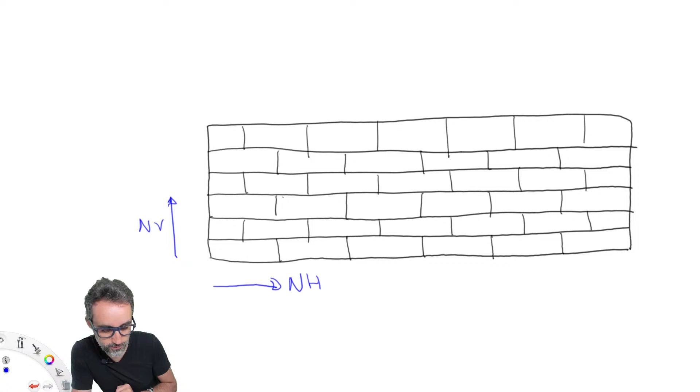For this one we're going to calculate the amount of bricks in the horizontal direction, the amount of bricks in the vertical direction, and then obviously for each brick we're going to calculate the width, the height, and the depth. That's going to be very simple.

So now once we have that, we will want to notice that there will be several different families. This will be one family of bricks. The second family will be this family of bricks here.

So before that, we're going to add here that we will want to find the center points of each one of these bricks. Oh, that's not going to work. We will want to find the base point for those bricks, right? And then once we have this, we want to do also the base points for each one of these.

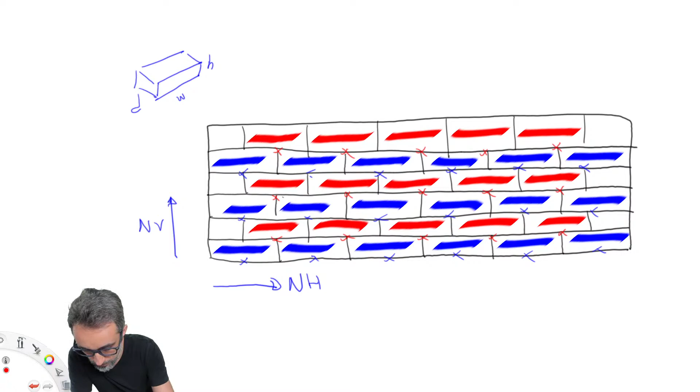And for this, I'm going to call these bricks the base bricks. Those are going to be the base. Then these ones are going to be called the central.

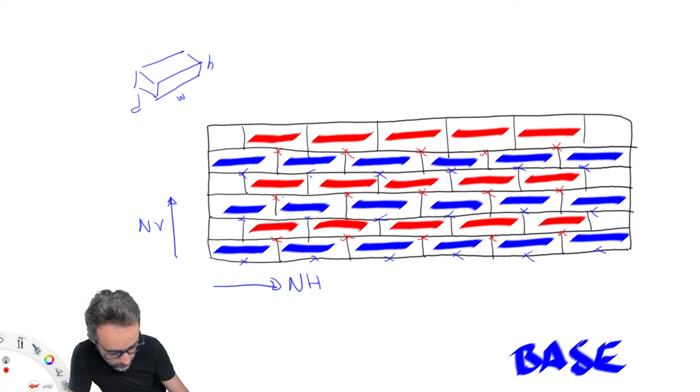And then after that, we are going to have these bricks. This one, this one, this one, this one, this one, and this one. Those are going to be the edge bricks, for example. Doesn't matter what we call them, really. And then we will have to find the base points for all of them.

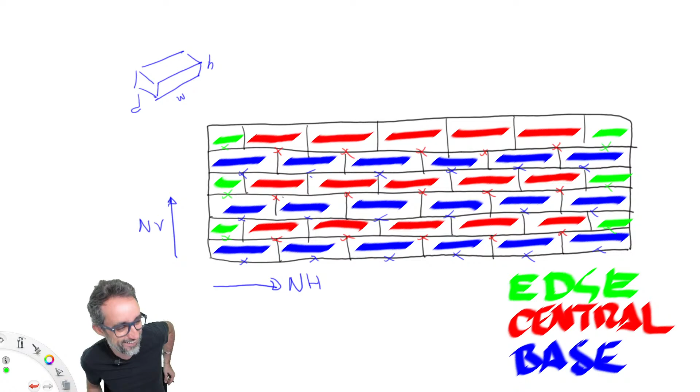The mortar thickness. We will include the mortar thickness, Richard. Don't worry about that. We will make sure. We'll make sure to include Carl Singline.

What is this? Oh, so Carl Singline is a person. Ah, okay. Oh, he has an interview with Brian. Oh, okay. All right. I think I've seen this channel before. Yeah, it has a bunch of robotic stuff. Oh, yeah, that's pretty cool. But you're right. It's how to generate a brick wall in Grasshopper. Yep.

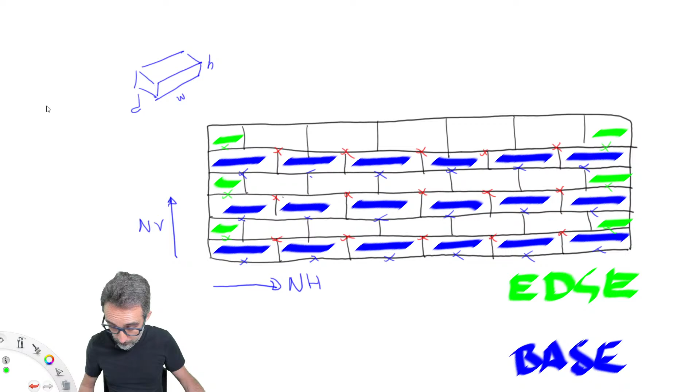Well, that's a different method. We're going to use a different one here. Oops, no, not this one. Here. Okay, so we are here, I think, and then if we take this off and this off and this off, that's all about the points we need to generate. So I think I can probably start telling that story.

Okay. All right. Let's get hands on. So,

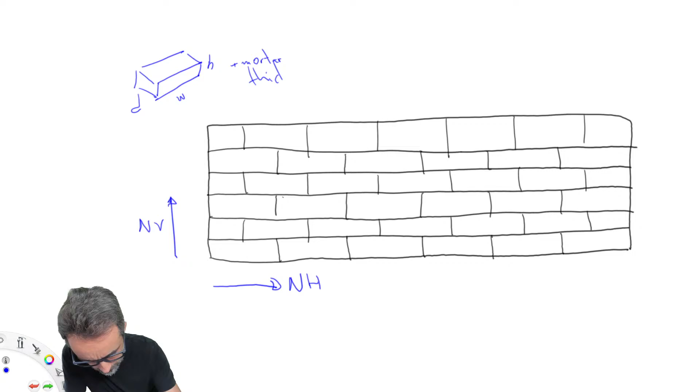And you know what? Where's Richard? You're also right. Let me add here somewhere that we're going to add the mortar thickness as well. Plus mortar thickness. It's very difficult to write here. Oh, that looks terrible. It's fine. I'll just say it verbally that we will add it as a parameter. Don't worry. All right.

Am I centered on the screen? Yes. All right. Let's do this. This is going to be a tough one. Okay. My batteries are low. If they go away, just let me know. Just bang the chat, okay? Okay. All right, let's get started.

So there are many different ways of creating brick walls. It depends on what your parameters are, whether you have a surface and you want to generate a layout of bricks that approximate that surface. That's one way to go about that. Another way is if you have the axis lines on the floor and you want to populate bricks on top of those axis lines, that's a completely different story.

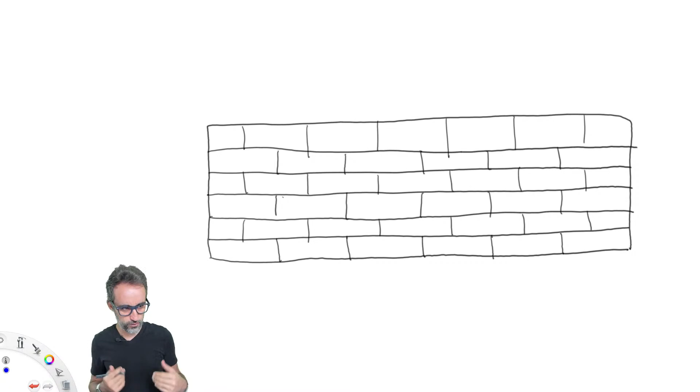For me, what's going to be important as parameters in this particular exercise are going to be how many bricks do I want in one direction, how many bricks do I want in the vertical direction, and then the dimensions of the brick. As simple as that.

And then the more rows, the more columns, or the bigger the bricks, then the larger the wall will be. And I'm going to assume that it's going to be a very vertical wall that is probably going to be on the XZ plane, like a vertical wall, something like that, okay? But again, this is a very simple way of looking at it.

If you need other inputs, such as a surface, there are other algorithms. Maybe at some point we can do examples about that here in the channel. We'll see about that, all right? But I actually like this example because it's a bit more data-centric and it involves a little bit more data manipulation as opposed to other examples. And I think this is something that I want to strengthen in this series with all of you. So that's why I'm going to choose this one.

Now, what is this process going to look like? Well, it's going to be very simple. As we have seen before, when we create arrangements of things that have slightly different orientations or locations, it's very useful to think of these walls as arrangements that have several subgroups of elements within them. So in this case, I think it would be useful to think of the wall as having three groups. One of them is what I'm going to call the base bricks, which is the first layer of bricks, all full bricks, and then that same layer every other layer as we go up.

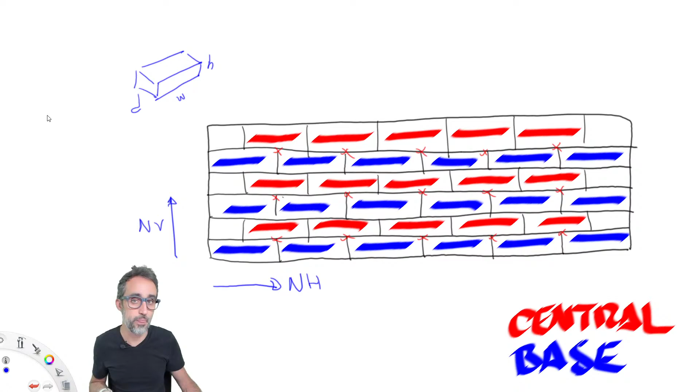And last but not least, we will have what I will call the edge bricks. Because the bricks are staggered, to have a perfectly square bound brick wall, I will need to create a special subset of small half bricks that will be inserted on the sides of the wall.

Now, I have not talked about that in the parameters, but very likely I will also want to control the thickness of the mortar between bricks. That could be interesting because it will also make it easier for us to see them when we render them. So I may want to add that as a parameter as well. As you can imagine, the problem is going to be as simple as generating 3 families of points, or better yet, 3 families of planes, on top of which we will generate these boxes with the control dimensions minus the offset of the mortar. Okay, so I think that is going to be the first step.

And as we get the brick wall up, the second step that we will follow further down in this video will be figuring out an algorithm to create the effect of an explosion in front of this brick wall. Let's get started with this one, and then we can figure out the explosion part.

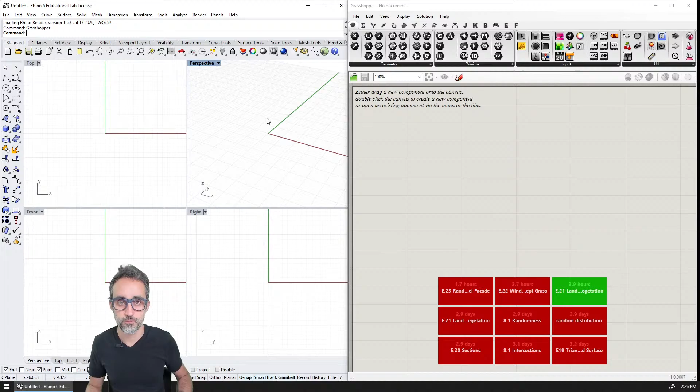And then, for example, I'm going to create a slider with 5 bricks in the X direction, number of bricks in the horizontal direction, number of bricks in the vertical direction. And then what are we going to do for the brick size? We're going to do the width, the height, and the depth of the brick.

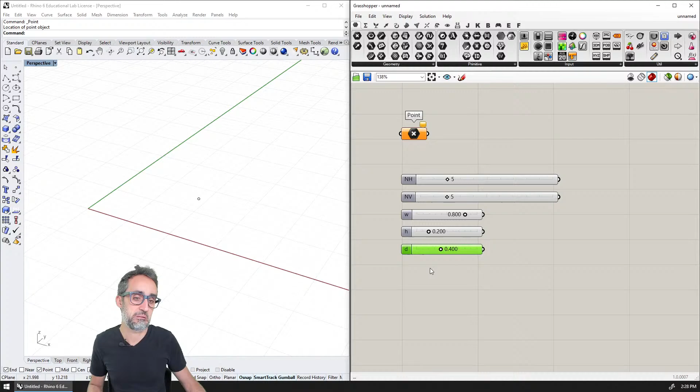All right, and then the width is going to be, for example, 0.8, the height is going to be 0.2, and the depth is going to be 0.4, which I think is about a nice proportion for a brick, correct? Let's see, let's create a box, for example. Oops, the other way around, like this. Yeah, this looks about right for a brick, huh? Okay.

So, all right. Let's do this. So, I am going to start by the mortar. Mortar thickness going to be 0.05. Maybe that's a lot actually. Okay, for example, that much. We'll see. Okay, so

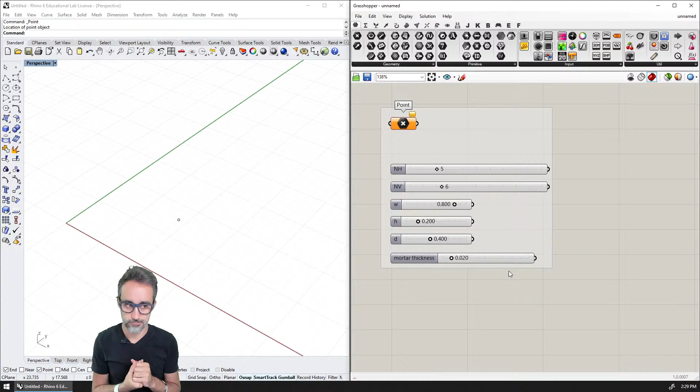now I'm going to start by taking the point in, creating an XY plane, creating a box, and then copying the box in the X direction. But instead of copying the box, why don't we just copy the planes? And then we use those planes for bricks, because that's going to be way more intelligent. Okay, so let's get started.

So I have gone ahead and started a Rhino file with a Grasshopper definition where I have created a bunch of sliders representing how many bricks in the X direction, how many bricks in the vertical direction, the width, height, and depth of each brick, and an extra parameter for the thickness of the mortar.

All right. And because I like having some kind of Rhino connection so that I can move things around, I've created a dummy point in Rhino that I will use as the base for the first brick, so that I can move this point around and move the wall around in Rhino with this tactile interface kind of situation.

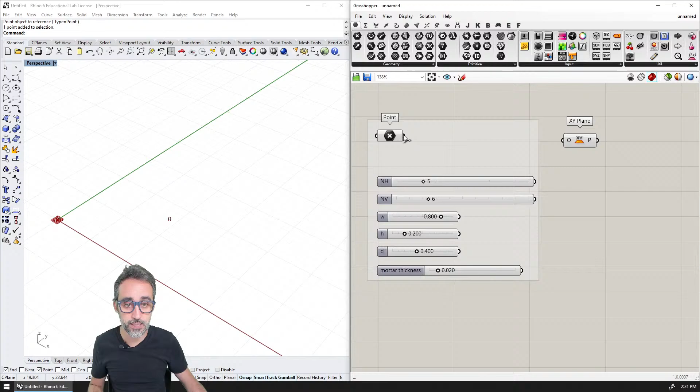And then, very simply, I'm going to create an XY plane based on that point, and a box centered around that point. So if I go to box and say box centered on a plane, you can see this is going to be the plane of the box. The size of the box in the X direction is going to be the width, in the Y direction the depth, and in the Z direction the height.

Is this so? Let me bake this and measure the distance between the starting point and the end point, and you can see that it's 1.6. That's what I was afraid of, because the size of the box in the X direction is actually double the size. So this is not exactly what I want.

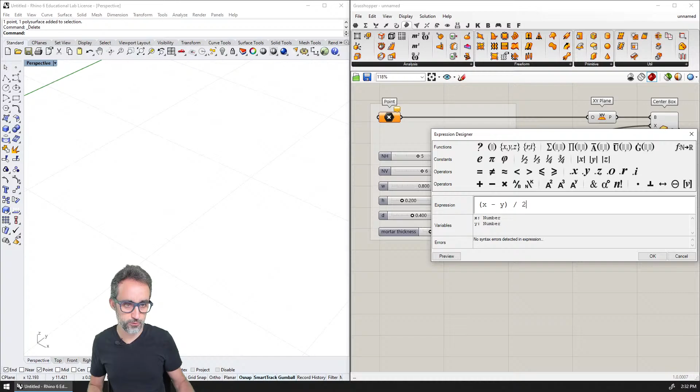So I would like to create an expression where I take the dimension and the mortar, and say the size of the brick in one direction is going to be whatever you're giving me minus the mortar width, divided by 2. And that's going to be the same for each of the 3 values: this is what I'm going to use for X, this for Z, and this for Y.

And where is my point? Oh, I deleted my point. Sorry. Okay, I wanted to delete this. And now let me bake this brick to see if it's okay. The distance between this point and this point now is 0.78. That sounds about right.

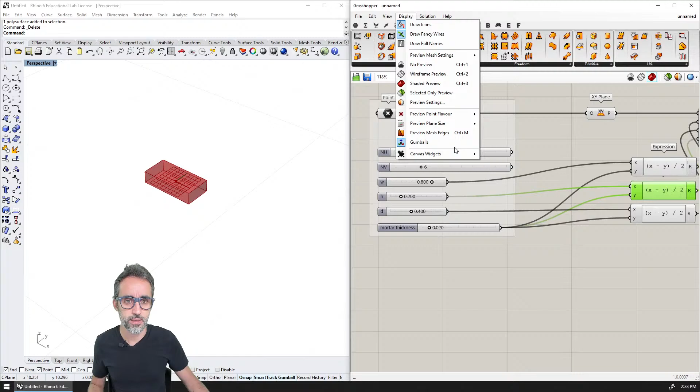Okay, and then I'm going to make the plane a little smaller, or maybe I should just make the bricks bigger. I don't know. I'm going to make the plane a little smaller in this case because it's taking up a lot of real estate here, or maybe even smaller, 0.3. Okay, all right, so I have the first brick.

I think we are off to a pretty good start, right? So I have the first brick, and then what am I going to do? Well, this is the first brick for what I have called the family of base bricks, okay? So remember, because I have now this point here, and you see that in the diagram I am representing it from the bottom, but I've actually chosen to just use it from the center, so maybe it's just easier to think that these points are going to be on the center. All right, so I have the first one.

Now what I need to do is generate this first row, and once I have that row, I will be able to copy it as many times in the vertical direction. So let me create that row by making sure that I create a series of numbers. I basically need to take this box and move it along the x direction. So I'm going to create a unit vector x, as many times as bricks I have in the horizontal direction, and the distance between them has to be this distance here, the width of the brick, including the mortar, right?

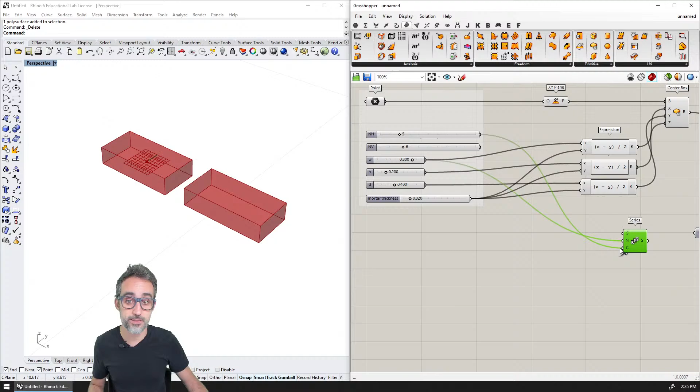So that's why I need to generate a series of x vectors that starts with 0, where the step size is going to be the width of the brick, and where the number of values is going to be how many bricks I have in the x direction. So that I'm going to compute here, and you can see that now I have the 5 bricks, and they're nicely separated by this 0.02 millimeter gap. Is that correct? Let me bake this, and let me make sure to measure the distance between them. So this one, distance 0.02. All right, wonderful. So this is working.

However, of course, one thing to notice here. What I have done is I have taken the one brick that I generated and I have copied the brick along the x direction. That has already created one box here that is redundant, right? But at the same time, because I'm moving the whole brick, now I have lost references to where the center of each brick is, which I will need farther down the line when I start doing the explosion part. Because I will need to calculate the distance of the bomb to each one of the bricks, and right now I don't have a reference to the brick.

And I also discussed in previous videos how generating a box may not seem complex, but it's much more complex than a plane. So generating complex geometry as an intermediate step, if you're not going to use it, is not a great practice. So actually, I would like to suggest that we put a hold on creating any kind of brick yet, and instead we work only with planes. We copy these planes, we create arrays of planes, and then when we are done with creating all the planes, we use those planes to generate clean boxes that are perfectly ready to be populated like this, you know? So that's what I'm going to suggest right now.

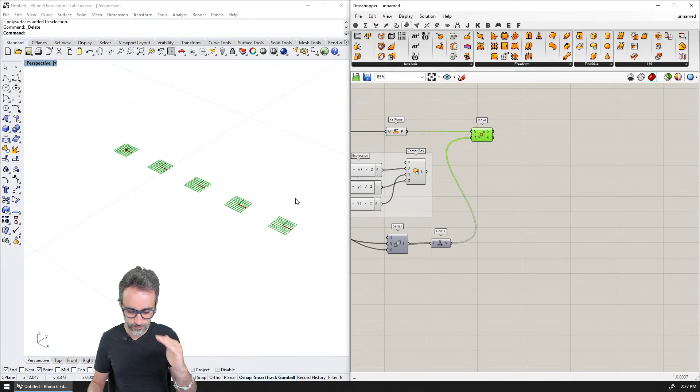So I'm going to take this and I'm going to say 0.5 times the value of x. So that is what I want to do. So this is going to give me the value of 3. And then what I need to do now is I need to take all these planes and copy them in the z direction 3 times.

So if I have 6 here, so half the amount of rows. So very similar as well. So I'm going to do series and I'm going to start with 0. The step size is going to be 2 times the height of the brick, because remember, in this case now, the blue rows are spaced 2 bricks apart. So I'm going to do another expression here, which is going to be, I'm going to take the height of the brick and I'm going to multiply it by 2. And the step is going to be 2 times that.

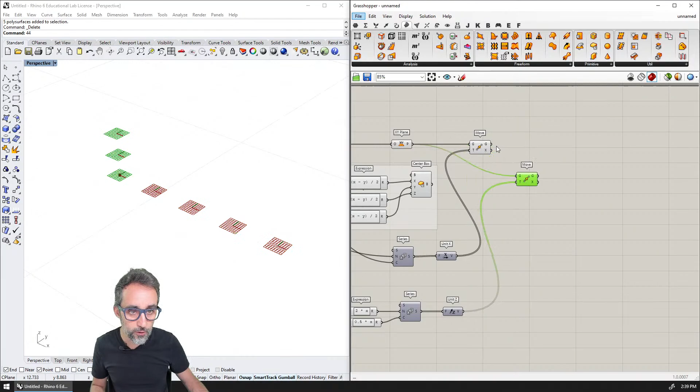And then how many values do I need? Is going to be half the amount of vertical rows. And I'm going to use that to create Z vectors. And then I'm going to use that to move all these planes in the Z direction. But you're seeing that we're getting data problems here. So what I'm going to do is I'm going to graft this and I'm going to use this here.

And now you can see that what I have is a data tree that has 3 branches, 1 per row, and then 5 planes for each one of the rows. All right. And I have decided to graft here just because I think that having the bricks on the same row, on the same list, is a little cleaner than it is the other way around. But there's no big particular reason here.

Now, this could go well, except for the fact that if I now have 5, 4, 3, 2, well, this actually is working. So if I have 7 rows, this is fine. So, okay, this is going to be fine, but it will not be fine very soon.

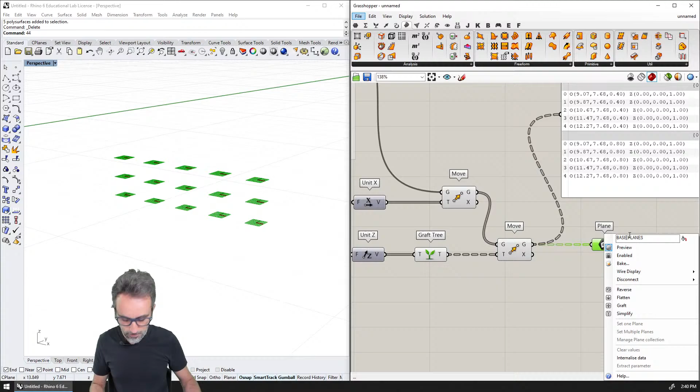And as I said before, this would be very ready now to, for example, be plugged in here and create these bricks. Okay, but we're not going to do that yet because we're going to put a pin on that one. Or, I mean, we can turn it off, why not? But it can already be there.

Now, what is the next thing we need to do? We need to work on the central bricks. The central bricks are going to be very similar. It's just that the first one is going to be a little offset. So we're going to have to move the plane a little bit in that direction and then create a grid with a few less elements. So it's going to involve a little bit of numerical manipulation. So how are we going to do that?

We're going to take the original plane, all right? And then we're going to create a new vector to move this plane and offset it here to the origin of the new collection of the central planes. So that is going to be a distance that is going to be half a brick in that direction, and it's going to be a full brick in the vertical direction. So let's do that. So I'm going to go here, okay?

And I'm going to move this plane. I'm going to take this plane and I'm going to move it, okay? And then how much am I going to move it? I'm going to move it by a vector that I'm going to create from x, y, z coordinates. The x coordinate is going to be half the distance of a brick. So I'm going to copy this expression and I'm going to say half the width of a brick. That's going to be the x.

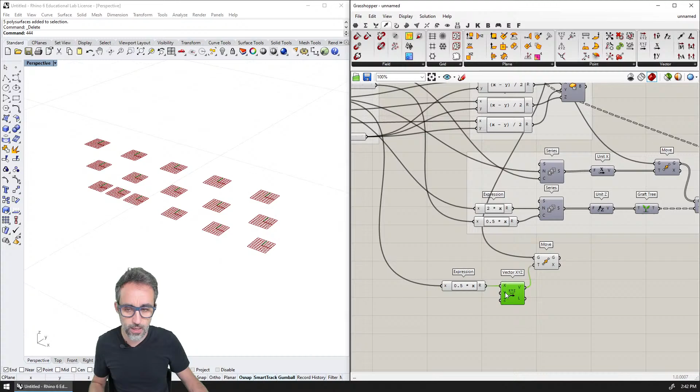And then in z, sorry, not in y, is going to be a full height of the brick. Okay, so can you see how this brick is now like right there in the middle? Correct. So that is going to be the initial plane.

And then at this point, I think the rules for making these planes are going to be fairly similar to this one. So what I'm going to do is I'm going to move the original plane. I will want to move it in the x direction by a series of vectors that are apart a distance of the width of the brick.

So I'm going to create a new series, which is going to start at 0, and the step size is going to be the width of the brick. And the number of values is going to be the number of bricks in the x direction. But that's actually not true, because if I do that, then I get one extra brick on the other side. So what I actually need to do is create an expression here. Look at what I'm going to do.

I'm going to press Shift and Control to detach this cable and plug it into the other place. And then here I'm going to say, whatever you give me, -1. And then I'm going to plug that in here, and now I have this many elements, -1. Oops, actually I think I connected too many things. So let me do this. All right, now we got it.

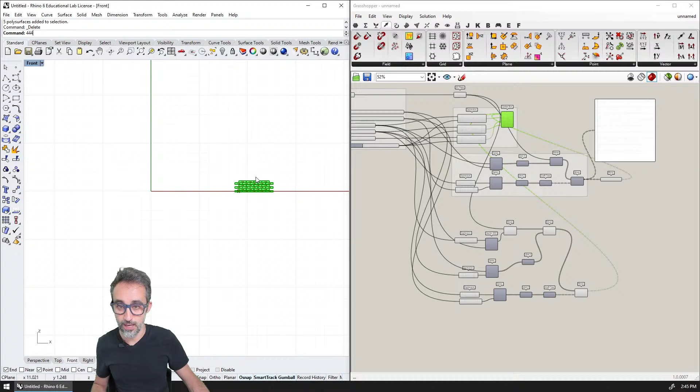All right, so if I do that, then I'm going to get these planes, and if I turn this on and plug the planes in here, you can see that I'm very close. Let me do a frontal view. I'm very close to that. However, there's a tiny detail that is not going to work.

Let's say right now we have 6 vertical rows of bricks. If I now switch to 5, you can see that it doesn't switch to 5. And if I switch to 4, it all of a sudden removes 2 rows. And if I switch to 7, I get 8 instead, and 8 stays as well, and 9 gives me 10 rows. So there is some kind of problem with having an odd number of vertical rows.

And that is because when I have an odd number, for the base bricks, the blue ones, I should have half the amount of rows rounded up. So when I have 7 rows, I should have 4 of these base rows. But for the central ones, I should have half this number rounded down. So that's going to be 3.

And this is not happening because here, when I have these planes and I say how many times do I need to copy them up, I'm using this expression, and the amount of elements is being rounded up to 4 in this series. Because when I say how many numbers do I need, I need half x, x being 7, the number of rows. So here the value is 3.5, which is technically correct. But inside of series, it is automatically rounded up, whereas what I need is this number to be rounded down.

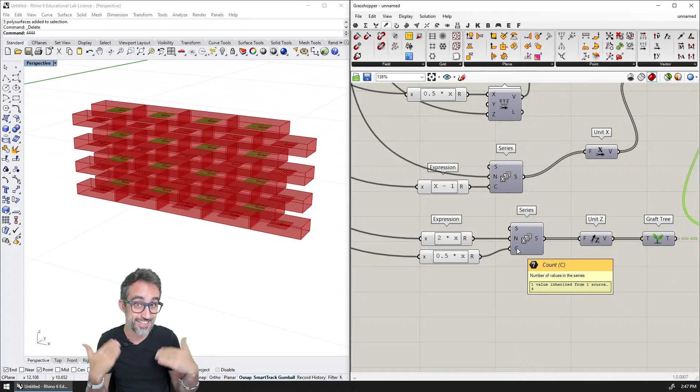So I'm going to use the expression editor, which is wonderful, to find an expression called floor. Floor is a function that takes a number and rounds it to the largest integer that is less than the specified number. In other words, it rounds the number down. So I'm going to calculate the floor of whatever this is. And this gives me the number 4, which doesn't get weirdly rounded. And now I get exactly the 4 rows that I wanted.

And if I now play with this, you can see that now 8, 9, 10, 11, 12, or less or more. All right? And I'm going to make this a little larger as well. Or not.

I'm just going to, sorry, I'm just going to make this a little smaller because it's easier to control like that. Okay. Wonderful. So we have two of the groups. Now let's go off to the third group.

Oi, oi. Saeed, how you doing? All this parametric craziness, and here we are doing like square bricks. How about that, huh? Okay.

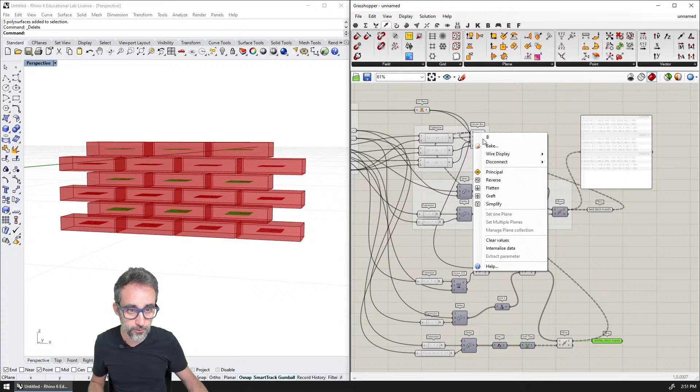The first thing we're going to do is keep things tidy here. So I'm going to call this central brick planes, and I'm going to plug that in. I'm going to disconnect everything here. I'm going to disconnect this. I'm going to plug this in here, and then I'm going to turn it off so that we don't have the visual clutter.

So first thing is going to be moving this plane to a position that is going to be here. And this is going to be in the Z direction a full height of the brick. And in the X direction it's going to be a quarter of a brick, I believe, right? Let's see if that is true.

So first of all, I'm going to group all of this here so that it's clean and tidy. And then I'm going to take this XY plane, I'm going to move it all the way down here. And then I'm going to calculate myself a new XYZ vector. And the X coordinate is going to be a quarter of the width. So I believe this one is taking the width. Yes, it is. So this is going to be 0.25. And again, this is the beauty of using expressions. They're super easy to edit.

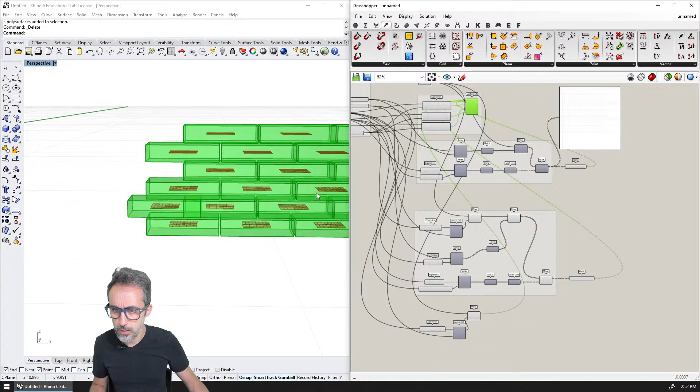And then the Z is going to be basically the height of the brick. And I forgot that this has to be negative. So this is going to be negative, and it looks like that brick is kind of halfway there. So let me turn on the bricks. Okay, so you see that this brick is already halfway there.

So in order to make things a little easier for me, these are the full bricks, and I'm going to copy and paste all of this, and I'm going to create another one that is going to be half bricks. And half bricks is going to be basically the width divided by 4, and then it's going to be 2 and 2.

And as I do that, I'm going to plug that one in here, and you can see that I now have my brick. And I see that I will need to do a better job with the margin. So I will need to say 2 times the margin. Is that what I need to do? Yes, but then the margin is a little bigger here. So I will need to actually work with the margin a little bit to improve it.

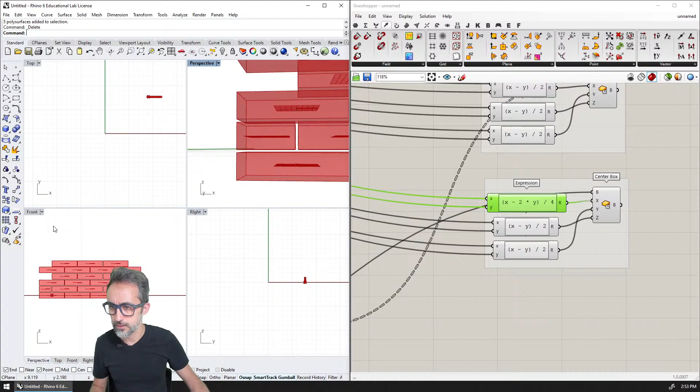No, actually this is correct, right? Yes, you're right. So this is correct. So I needed to double the margin to align this here.

So, okay, so I have that there. That is working. And then the only thing that I need to do now, that was just for the sake of prototype. All right. Should I turn off the other planes? No, I'm just going to keep them there. So I have this plane.

And now what I need to do is calculate how far away I need to move it in the X direction. So that's going to be a series. I'm going to move it in the X direction with a series that is going to have two elements. So I'm going to just hard code this. I'm going to have two elements, so that's going to be the number 2 here.

And then the step size between them is going to be some number. What is it going to be? 1, 2, 3, 4, 5. So it's going to be the amount of bricks on the X direction minus 1 times the width plus another half of these bricks here.

So let me do the rule. The rule is going to be that I'm going to take the width of the brick. Is that what I have here? Yeah, that's the brick. And I'm going to have the amount of bricks in the X, in the horizontal direction. So that's going to be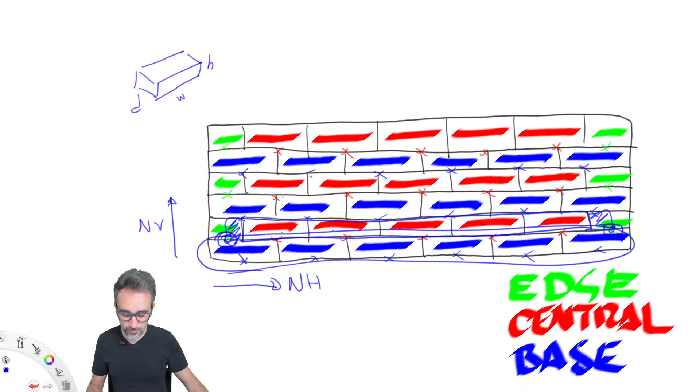And then to that, I actually need to add half a brick, because I have a quarter of a brick here and a quarter of a brick here. So that makes a half of the brick. And therefore, if I have 6 bricks here, the distance between these 2 points is 5.5 bricks.

So this is going to be very easy to encode in an expression: this is going to be the width of the brick, and this is the number in the horizontal direction. I'm going to plug that in here, and then I need to say the width of the brick times how many bricks are in the horizontal direction minus half a brick. I'm going to move this all the way down here, and plug that in there.

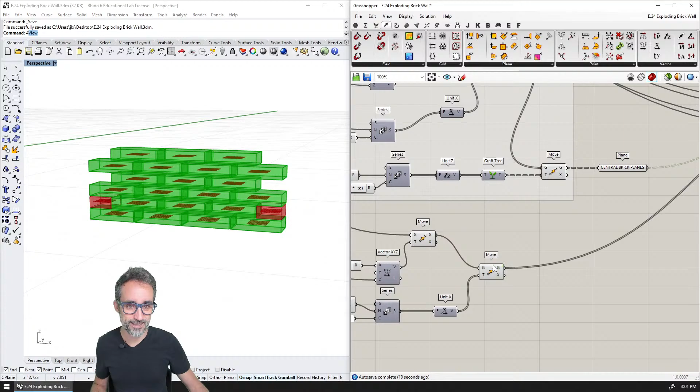And if I now take this here, is that looking good? I think that's looking pretty good, isn't it? Choo-hoo! All right, so now it should be as easy as copying this one, which is the exact same one we used for the other rows, plugging it in here, and then plugging this in here, and we can see how we have now the perfect wall of bricks.

And is this parametric enough? Let's see. I'm going to extend this 4, 5, 6, 7. This is looking pretty good to me. Okay, and then 6, 7, 8. It looks pretty good to me, right? So, yoo-hoo! I think we have a parametric wall of bricks, which gives me a lot of OCD internal pleasure.

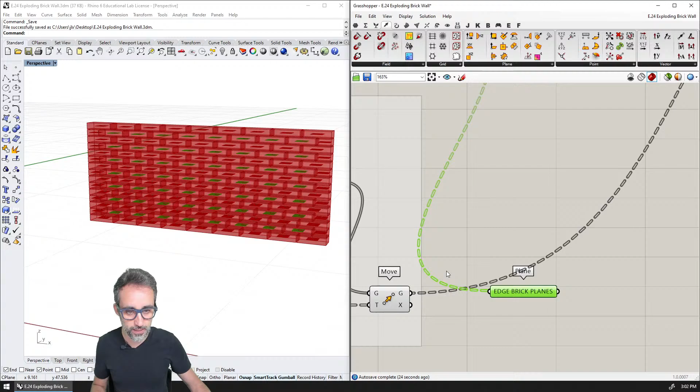Okay, so I'm going to just make sure that everything is a little more clean and ordered. So this is going to be the edge brick planes. I'm going to plug those in here. And if I turn everything off now, for example, and I make sure that these are off, and this plane here is also going to be off, and this point is going to be off. And because I have this point, I can now move the whole wall. I can move it wherever I want.

All right, wonderful. So this was a little tedious and it looks a little bit like spaghetti, but at the end of the day, it was a lot of very simple numerical relations with each other, which at the end of the day is a lot of what we do in parametric modeling. It's just simple numerical relations between geometry.

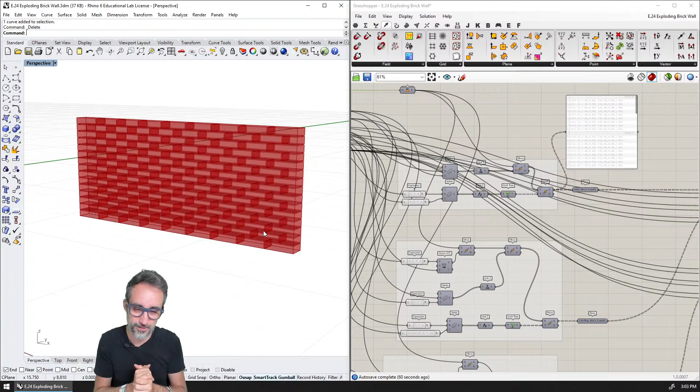Wonderful. So with this, I think we are ready to now start tackling the problem of the explosion of the bricks. Sorry, I'm a little thick today. So let's take a look at the explosion of the bricks. Okie dokie. Let's explain the explosion of the bricks.

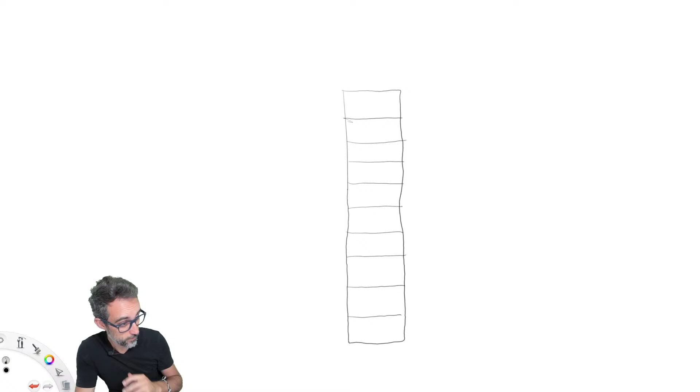So I'm just going to make a new one. All right. So I'm going to take a look at this. Say this is the brick. Right, now we have a brick. 2, 3, 5, 8, 9, 10. Okay. And we have here, of course... Wait. Make some room here. I really want to draw this nicely.

And we're going to have, of course, a bomb. I gotta have so much stuff in here. So it's going to look like a tiny bomb, like in the cartoons, you know? And then with this thing here, and we're gonna have this thing here. Of course we had to do that, right? Oh, screw that. We're not doing that.

All right. But now what we actually care about is basically where this is, and then where each one of these bricks is. So this is what I want to care about. Okay? So now, what are we going to do next? Once we have this, I want to create some kind of rule where the elements that are closer to the bomb go away much farther, and the ones that are not so close, they explode in a smaller way. Right? So that's what I want to do.

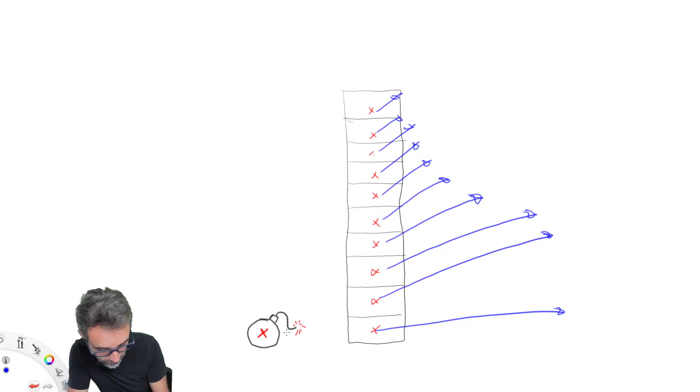In order to do that, I can do an inverse relation, because I can calculate all these vectors here. I can calculate this vector and this vector and this vector and all these vectors here. It's fine. I can keep doing that. And then I can do this, and this, and this.

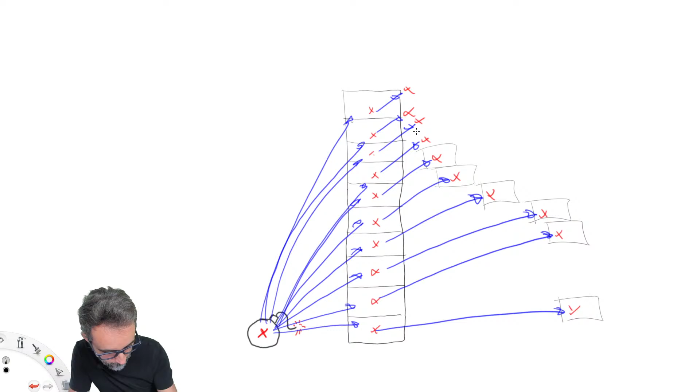And then once I have that, what I can do is I can just move the planes there, and then, oops, I needed to do a different layer. Once I have this, I can just move the planes, and then after that I can just draw the brick. All right. Okay. I think we're going to go with this.

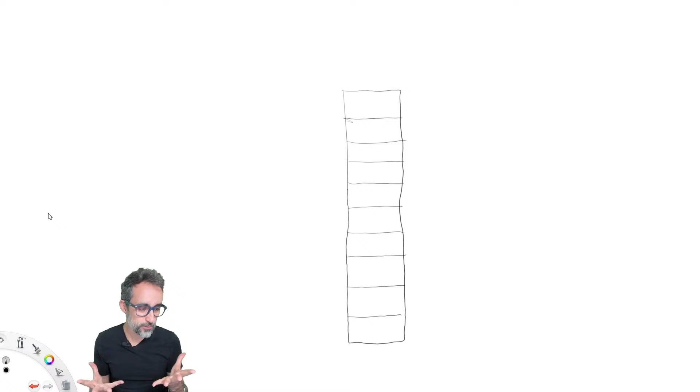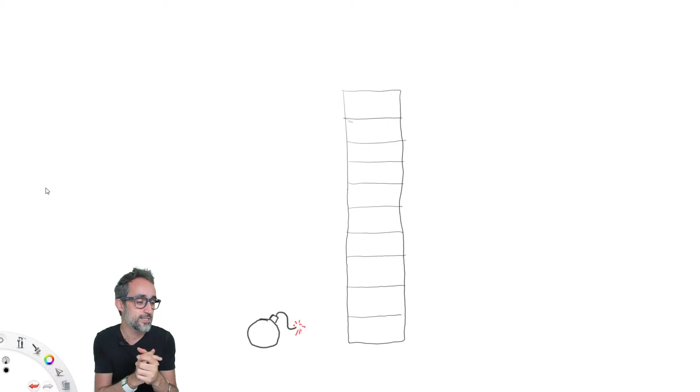All right, for the explosion, it's actually going to be fairly easy in a way. It's just that we're going to need to conceptualize a few things here. So if we look at the wall in section, we will imagine that there is some kind of exploding artifact next to the wall, and that the effect of the explosion of this artifact is going to affect the position, and eventually, at the end of the exercise, also the rotation in 3D space of these bricks.

And as we already know, for us a brick or an exploding artifact, at the end of the day, we're going to abstract everything to what we're interested in, which is, for example, the center points that define those two agents. And if the spirit that we want to incorporate here is that of an explosion, then something that happens very often with explosions is that things that are very close to the exploding artifact get the most damage or the most energy, and things that are farther away get the least energy from the explosion.

So it turns out that if we have these bricks, we will probably want something along the lines of the bricks that are lower, closer to the exploding artifact, to move the fastest away, and then the ones that are farther away to just move a tiny bit, right?

So it turns out that we can find a pretty simple rule to do this, which is, because we can calculate the distance of the center of the bomb to each one of the bricks, we can do an inverse relation, and the shorter the distance, the bigger the effect that explosion has on the brick.

If you remember, far back in this series, when we did the exercise of attraction repulsion, we affected the size of certain elements based on that distance. So this exercise is technically an attraction repulsion exercise, where we're just going to move the center of those bricks a distance that is inversely proportional to how far away they are from the bomb.

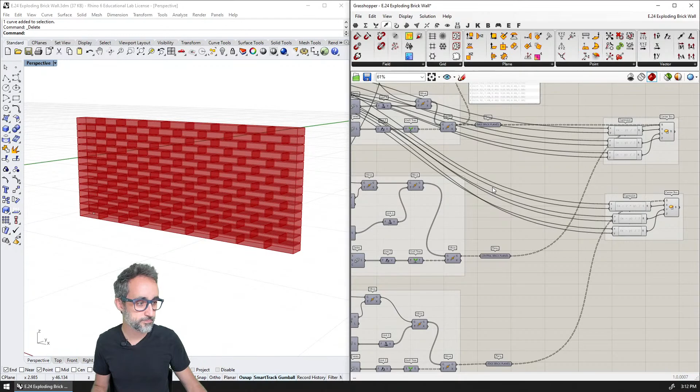Before we do anything, I'm going to do something that I typically don't like doing, but because we have 3 families of planes, things are going to get a little confusing very soon. So I'm going to take all these planes, merge them here together and flatten them.

So I'm going to right click and flatten them for the sake of having a full list of the big planes. And at the same time, I'm also going to create a very similar version for the other planes, so that it's a bit easier for me to work than with 3 families. And remember, I'm going to be working with planes. I'm going to leave the boxes to the very end just for visualization.

So what are we going to do now? I'm going to place some kind of point here that I'm going to bring into Grasshopper. So I'm going to right click here, point, and bring this in here, and this is going to be the center of the bomb.

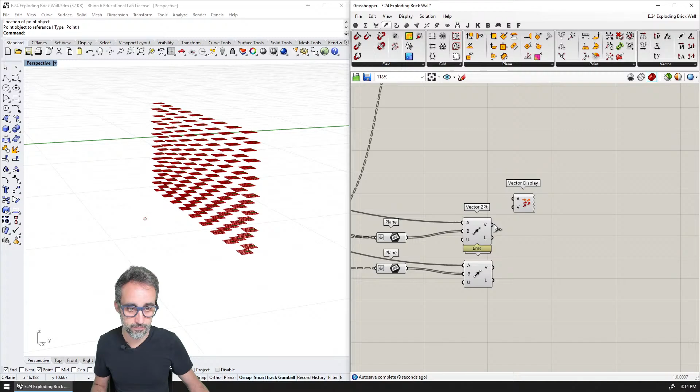And then what I would like to do now is to calculate a vector that goes from this point to every single point of the family of big bricks. So that's going to be one, and then a similar one to the smaller bricks. I can visualize that with display vector, and I can visualize these vectors on this point. You see?

This component also gives me the length of each one of those vectors. So if instead of visualizing those vectors from the center, I visualize them from their actual center, you can see that right now, if I were to use those vectors to move the planes, we would have the inverse rule. The ones that are farther away are moving a lot. The ones that are close are moving not so much.

So what we need to do is take those lengths and find an inverse rule. That is going to be an expression of the kind 1 divided by the length, which was the input x. And now, if I take these vectors and force them with the amplitude command to have a length that is inverse, you can see that the vectors now have changed to something like this.

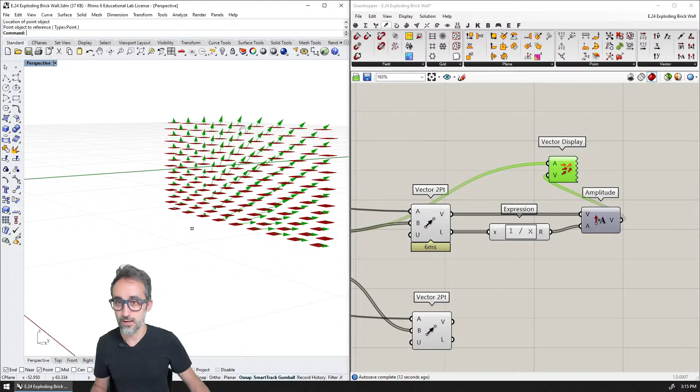You see that the vectors that are closer to the bomb are much stronger, and the ones that are farther away are weaker. You see this? So if I were to now take these vectors and move the planes with these vectors, you could see that the planes have now been modified by these vectors,

and if I plug that in here, you can see how the explosion starts to play out here on the wall. You see? So now we are starting to get the desired effect.

Now, this, however, is just a static way of modeling the bricks. But you have seen in the previous exercise, where we did the grass that was blowing with the wind, that we could use the concept of time as just a number that increases sequentially.

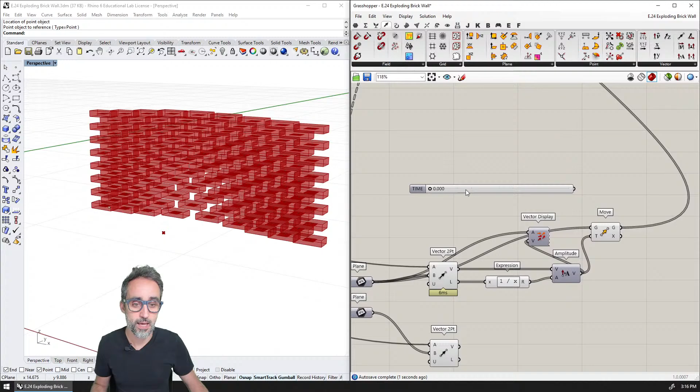We could use the concept of time to create animations that convey meaning. So for example, I'm going to create a slider that I'm going to call time here. It's going to have, I don't know, 3 decimals, and it's going to start at 0 here. And if I multiply the inverse value by the time, then whenever the time increases, the length of the vector is also going to increase, right?

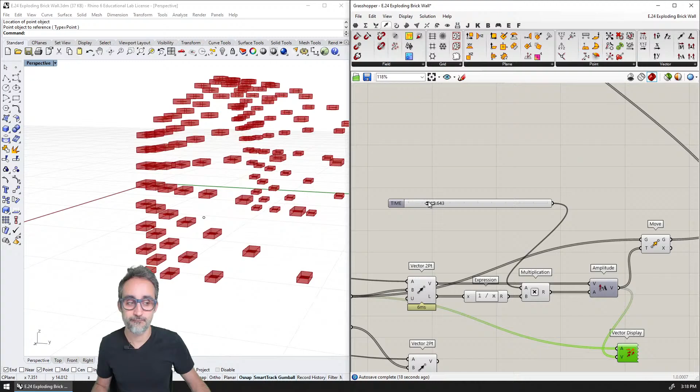And if I move this point, for example, and if I increase the size of the wall, I'm going to get a much nicer effect here. Where is this time? Can you see this? Bam. Quite cool, huh? Interesting, right?

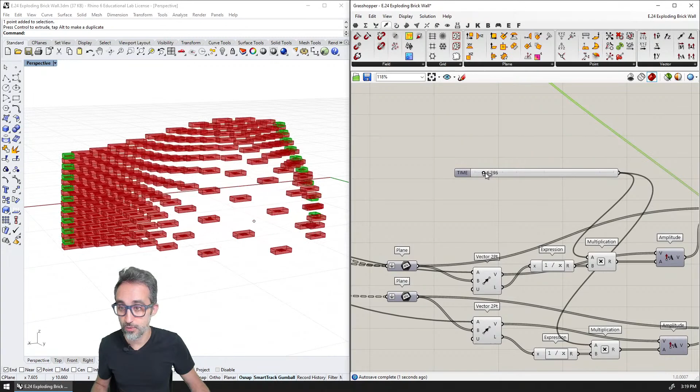Alrighty. So that's that. And remember that we need to do the same thing for the tiny bricks on the sides. So I'm going to copy and paste this, and the lengths are going to be these ones, the vectors are going to be these ones. We need to move these planes by these vectors, and we need to plug that in here. And now the tiny bricks on the sides are also going to explode according to this rule.

Whoa, this brick is coming! Oh! We got in the way. Okay. All right.

Okay, so we're very close. So now the bricks explode with a rule of attraction repulsion, literally. And then the last thing that I would like to do is implement a rule where the bricks, because right now they just move as if they were extremely linear, but that's not how it would work in reality. In reality, they would start rotating in some kind of crazy way, right? So I would like to implement some kind of random rotation in this explosion to give it a much more interesting feeling. So shall we do that?

Okay. Dr. Vector. Exactly. That's what they call me. Dr. Vector. All right.

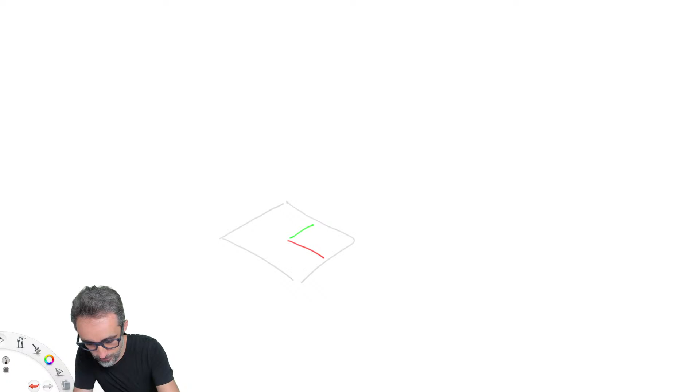What do we have now? Rotations. So how am I going to explain that? Basically what we have is a plane here, right? The plane is defining the center of some kind of brick, right? And for that I'm going to use a smaller one. But now what we want is for this brick to start spinning in some kind of weird angle.

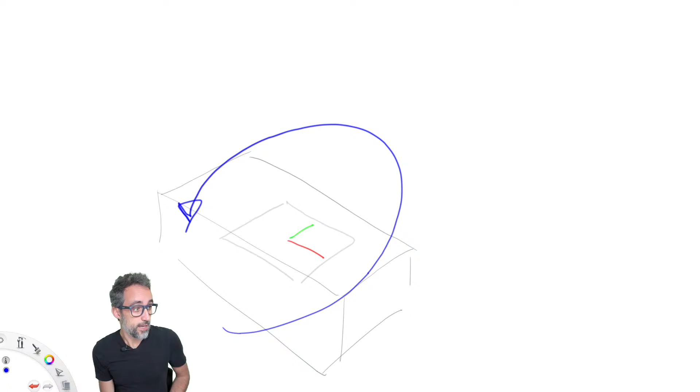Hi, Girish. Thank you. It's my pleasure to be doing this.

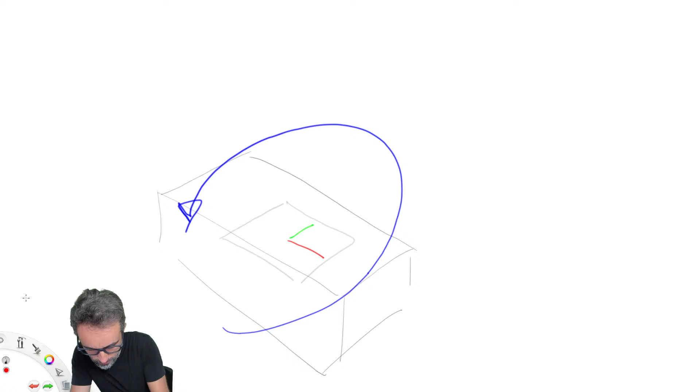So I want it to be spinning around some kind of weird angle so that the object starts spinning, as well as moving in whichever direction. So the brick is moving, and we want to keep moving the brick in some kind of random direction. So that's one thing. But we want to create some kind of additional rotation. Actually, you know what? I could draw this in a different way, like this, for example.

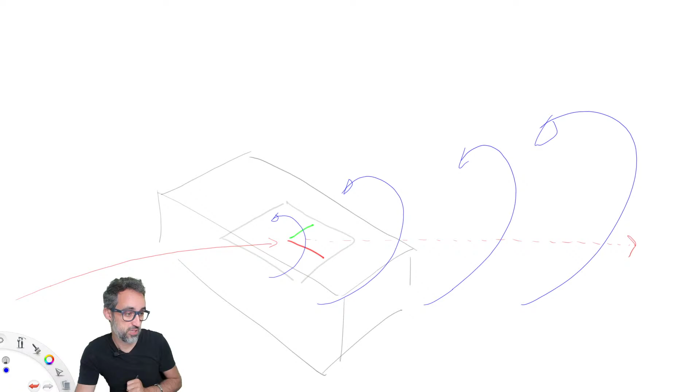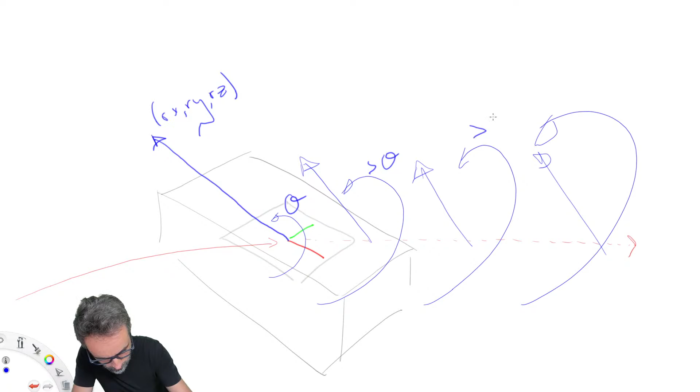So what I will need to do is create some kind of random vector with a random x, a random y, and a random z, so that vector, as it moves, stays the same, but we start increasing the angle. Theta, and then a larger theta, and a larger theta. And that way the thing will start rotating more and more.

I think this should be maybe understandable. We'll see about that. So, okay, then I'm just going to explain this. All right, so next, let's explain this.

So in a nutshell, what we want to do now is imagine that we have the center for each one of the bricks representing where the brick is going to be located. What we want to do is affect that plane so that not only is it moving in 3D space by the push of the bomb, but also, as it moves, it is increasingly rotating more and more. So if you see the brick, I can't really draw this, but every time it moves, it would rotate a little and a little and a little.

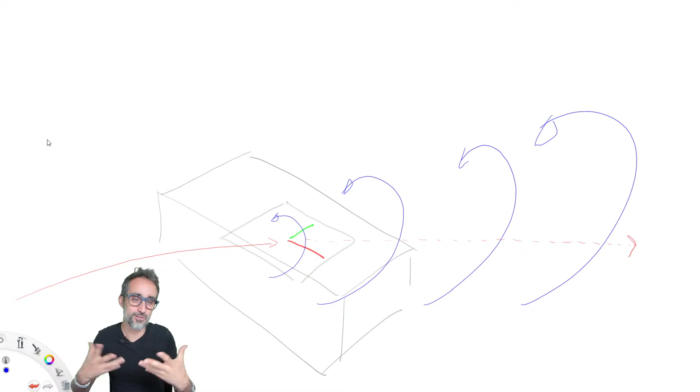And the key here is: where is it rotating around? For the push from the bomb, it was kind of clearer because there was a good relation between where the bomb is and the direction that the brick should explode, because of the energy explosion kind of situation. But for the rotation, it's actually not that clear. If you see videos of things exploding in the real world, they basically take some kind of weird spin in 3 dimensions. That weird spin is what we are going to model as a random vector.

So for each one of the planes, we're going to create one random vector with 3 random coordinates, random x, random y, and random z. And then as we move, we're going to start rotating that plane around that random vector for an increasingly large rotational angle. At the beginning it's going to be 0, but as we keep going, it's going to be more and more. And how is that going to be? It's going to be some value that is also probably going to be random, multiplied by the time, so that the more time passes, the more rotations we do.

Okay, so the bottom line is that the only thing we need to do is model a vector with 3 random coordinates, xyz, and then model an initial spin velocity that is also going to be random for each vector. And then we will use that velocity to multiply the rotation of the angle around that vector. Let's see how to do that in Grasshopper, and let's do one thing at a time, okay?

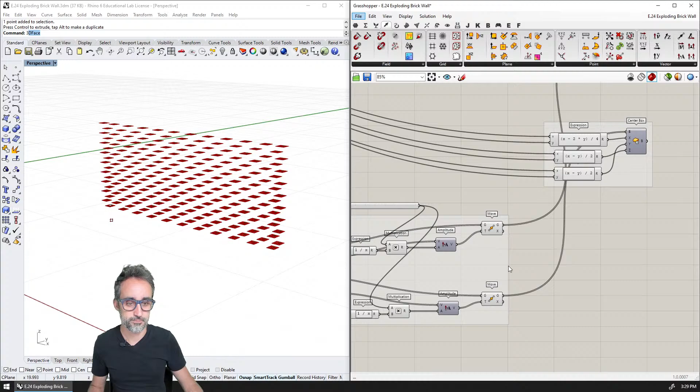So where were we? All right, we're going to model this. We're going to have this here, and we're going to have time. Okay. Let's focus first on the large bricks, all right? We can see how here we have one component that contains 189 planes, which are the center of each one of the large brick planes.

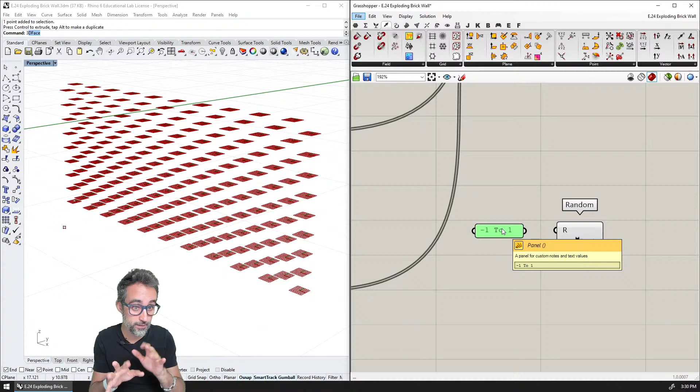So what we need to do now is generate 189 random x coordinates, 189 random y coordinates, and random z coordinates. So we double click here and look for a random component. The numerical domain of the random is 0 to 1 by default. I would like it to go in all directions, so from -1 to 1. And it turns out that domains can be written in a panel, just textually like that. So I can just plug that in, and you can see that my domain is -1 to 1. Anyway, it doesn't really matter.

The number of random values is going to be, in this case, 189. How do I know that? Well, I could find out the numerical relation of how many of these, plus this many, minus the number of rows, whatever. But that's a little too complicated, because I have all the elements already in one single list, as you can see in the panel. It's much easier to just ask for the list length of this guy, and this tells me that there are 189 elements on this list. So I can just plug that in there and boom, I have the 189 random values.

And for the seed, I'm going to choose a slider that starts at whichever number. Okay, so these are going to be random x coordinates. Now for the y coordinates, I'm going to do something very similar.

Okay, it's just that I'm going to plug in here the same, and I'm going to plug in here the same to avoid a little bit of redundancy. And here I'm going to add an expression that is going to be whatever the seed you gave me before. So I'm going to do +1, for example, or it could be 2 times that seed. It doesn't really matter. Okay, and we saw why this was important in the previous exercises when we were doing randomness. And for the third list of z components, I'm going to do the same, but I'm going to add here the number 2. So I'm going to use this to create x, y, z vectors.

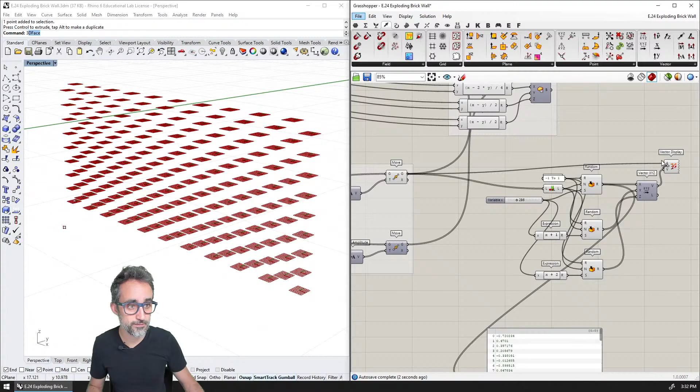All right. And just so that we can visualize this, I'm going to display these vectors, and the anchor is going to be the center of these planes. And you can see how I am getting, for each one of the planes, a random vector with some random orientation in 3-dimensional space. Okay? Which is kind of what I wanted. Right? Wonderful. So now, let's say that I take each one of these planes, before moving it or anything, and that I rotate it a particular amount around these vectors.

So the way I'm going to do that is I'm going to go to transforms, I'm going to go to Euclidean, and I think I'm going to use rotate 3D, okay? Which gives me the option to rotate a particular geometry with a particular angle, around a center and around an axis of rotation. So, what is the geometry that I want to rotate? I want to rotate the plane. What is the angle? For the time being, I'm just going to drop here a slider. We will improve this in a second. So that's going to be whatever.

And then the center, if I deconstruct the plane, is going to be the origin. And then the vector that I want to use for the axis of rotation is going to be those vectors that I just calculated right now. So I'm going to turn off all of this, and you can see that I have these planes here. So now let's see what is going to happen as soon as I start rotating this.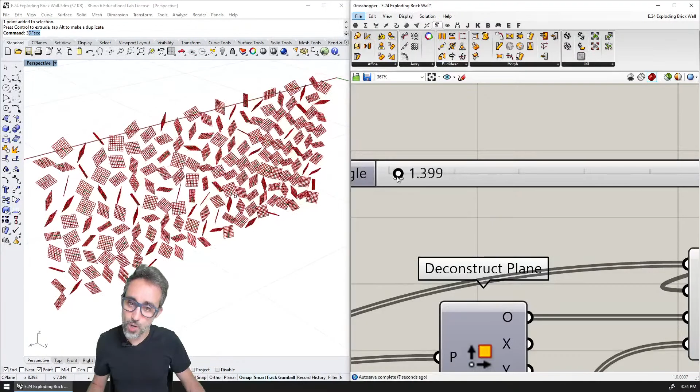So as soon as I start rotating, can you see how each one of the planes starts breaking out in a strange way? So let me use these planes to draw the boxes. So if I draw those boxes right now and I start rotating them, can you see how each one of the boxes starts now getting a weird spin, you know? And, oops, they all rotate. When they all rotate 2 times pi, they all align. That is actually not a good thing. Okay, but you see how this is starting to look like a random explosion. Okay, so that's great. And so that's one thing.

All right, and what is the next thing? The next thing is we're going to link that rotation to time. So for example, instead of a number, we can just use time. And now check this out. This is going to be seriously cool. As soon as I start increasing time, not only are the bricks going to move, but they're also going to start rotating in 3D. So check this out.

What? What? Joe! All right, Joe, nice. That is very cool. Okay.

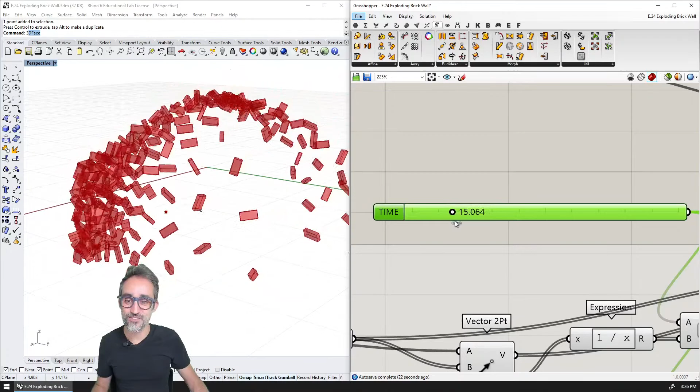All right, sounds great. It looks like we're almost there. It's just that there's a couple of things that I don't like. First, just like with the distance, the fact that all the bricks start rotating with the same amount of intensity doesn't feel natural to me. It feels like the ones that are farther away should rotate less strongly than the other ones. So maybe I need to factor the rotation by the distance.

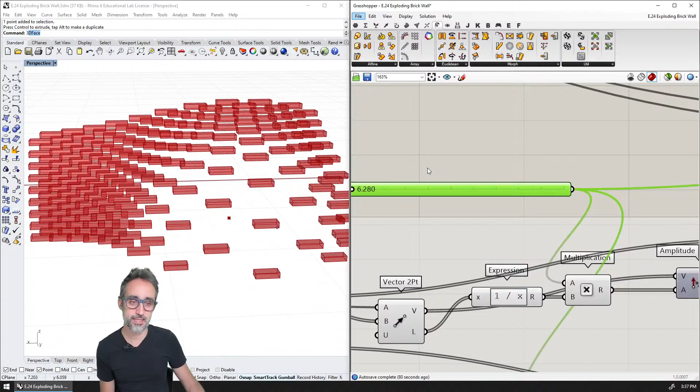That's one thing. The other thing is that because they all have the exact same rotation, when the rotation is 6.28, which is 2 pi, you see how they all kind of align again? All right? That is not good because it's also pretty unnatural. It looks like there's a period of frequency at which all the planes align again. So that doesn't feel very natural. But I think as soon as I factor in the distance, that is going to improve everything.

So if instead of multiplying by the distance, what I do is I multiply by the factored distance, I think that is going to fix things here. So check this out. So now I'm going to explode this, and you can see how these bricks start rotating much stronger than these ones here. And they start blowing out like boo. And now if I do 6.8, 28, there's no weird interval. Yay! All right.

Okay, so I think that is going to be the deconstruct plane, and then I'm going to rotate all of that here, and then I'm going to add this to the group, and then I probably just want to use this to draw. So that's one thing. And then for the other ones, for the tiny bricks, I'm just going to copy this whole thing here. I'm going to now start substituting.

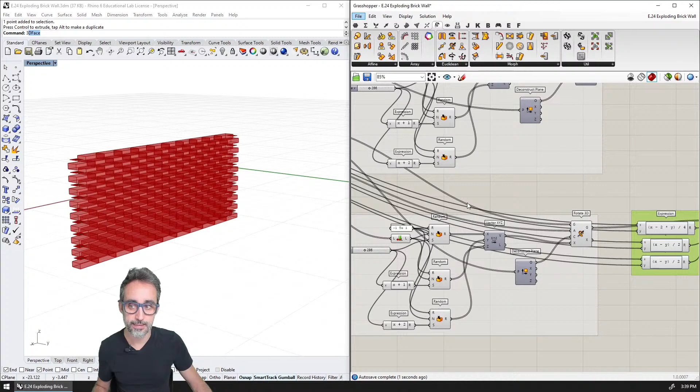This one needs to go here. This one needs to go here. This one, oopsies, this one needs to go here. This one needs to go here. And now this one needs to go here as well. And I believe that we should be fine now with the tiny bricks on the sides, right? Yeah. Woohoo! Yay! How cool is this?

Let me run it from my side screen so that we can see the large explosion. And then 3, 2, 1. I wonder, can we do this with a rendered view? Rendered view is not so good, right? Yeah, and it's kind of cutting down the bricks as well. Oh well, but it's cool.

Okay, how about you give me 1 second? I try to render an animation and I show you the video of the rendered animation. Give me a second. Let me try that.

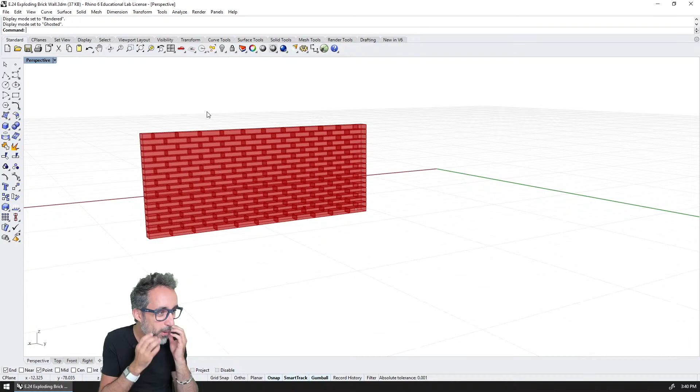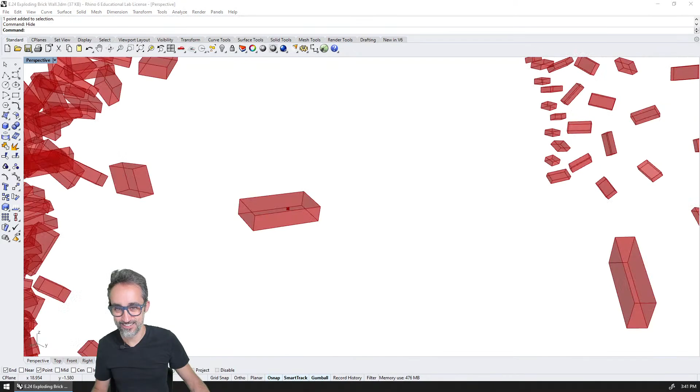What do you mean? Okay, so if I do this, and I think the range is probably something around 20, 25 here. And actually, I kind of like... okay, F7. I'm going to hide this. Nice. Okay, and all right, so I think with this I can start animating. So I think I can now just hit animate, and then we're going to create here. Do we have animation? And then we're going to animate this. Yes.

Wait. Are you guys talking about that other university down the road from where I live? Seriously? What you gonna do? You gonna go there and start writing Python and stuff? Seriously? You're giving me a really rough time this afternoon.

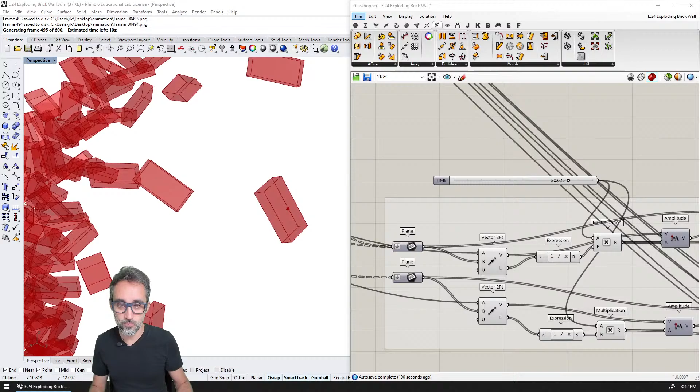Okay. And then I have animation here, so I'm going to open the terminal and I'm going to start FFmpeg, frame rate 30, input is going to be frame PNG, and then an exploding wall dot mp4, and then boom.

Well, I just finished doing this animation and I created all the frames and I turned them into an MP4 and it's looking something like this. Alrighty. All right, that looks cool. I like it. All right, great. Let's do it again. Another one. Boo! How cool is that, right? Isn't parametric modeling the best thing ever? All right, wonderful.

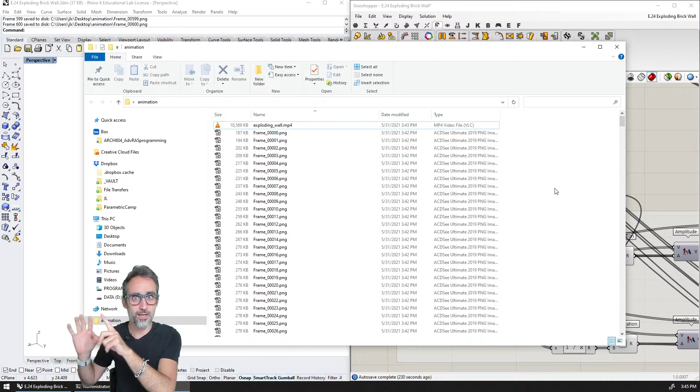So, oh, I forgot to mention the way I created this animation out of the frames is using a command line tool called FFmpeg. If you want to know how to do that, I have a previous video on how to animate a Grasshopper slider. You can get a really quick sense of how to do that.

And I think with this, that is everything I wanted to do. So I thought this was a good exercise to practice a little bit of data manipulation, a little bit of the generation of parametric geometry, but at the same time understanding how to use randomness in a controlled way to generate effects that are inspired by nature or by physics effects.

Obviously, this wall is not physically accurate because as soon as these bricks start rotating, they start hitting each other and blah, blah, blah. And as we extend them, there's no gravity pulling them down, which could also be incorporated here. So there's a lot of things that could be improved.

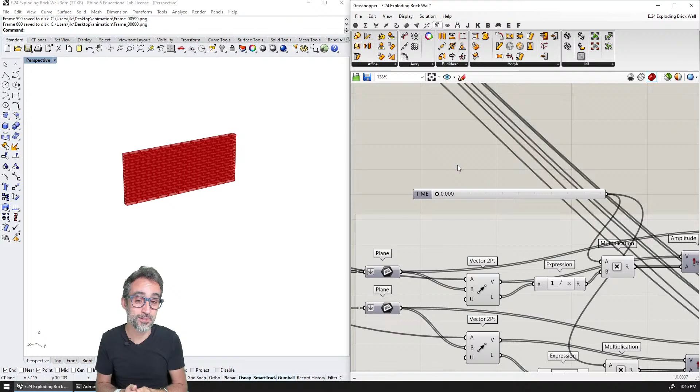So I think that was it. I am pretty happy with the result. And I am ready to move on to either new lectures or new exercises. I'm not sure what I'm going to do next on the series.

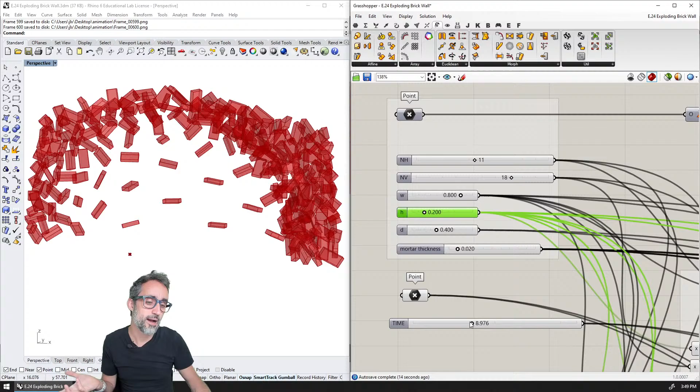mortar between them, right? But what's most interesting from this exercise perhaps is that we're going to also incorporate an effect here: we're going to model how this brick wall could look if it was under the effect of an explosion. And it's going to look something like this. We're going to have some kind of notion of time, and as time increases, some of the bricks are going to get pushed away much farther and they're going to start spinning randomly in the world, whereas the ones that were farther away are not going to be so affected.

We are going to use different levels of randomness and different logics of attraction and repulsion to achieve this effect, and we're going to end up the video creating an animation that is going to depict this explosion logic. And I'm kind of in the way. I'm going to get hit in the head by a brick. But it's going to be really cool, okay?

Obviously, the explosion is not going to be physically accurate. It's just going to be a visual simulation, but it's going to be really useful to understand concepts of randomness, concepts of physics-based simulation, and all those kinds of things. So I think it's going to be fun and interesting.

Perhaps it's going to be a bit more advanced than the general thread of tutorials that I've been following, but you're pretty advanced already on this series. So I think that if you're interested, you're probably going to be able to take it, okay? So less talking and more doing. Let's start modeling a parametric brick wall.